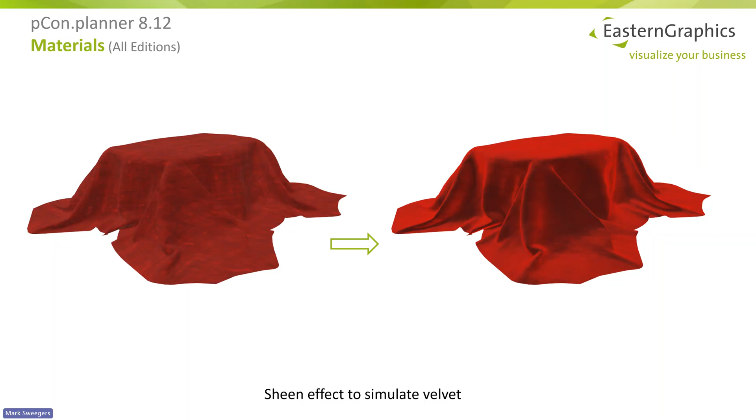So to give you some concrete examples, at first, what are we talking about? This is a concrete example of a sheen effect to simulate velvet, and you can really see the difference in the material applied to the red blanket in this case. The second one, a clear coat.

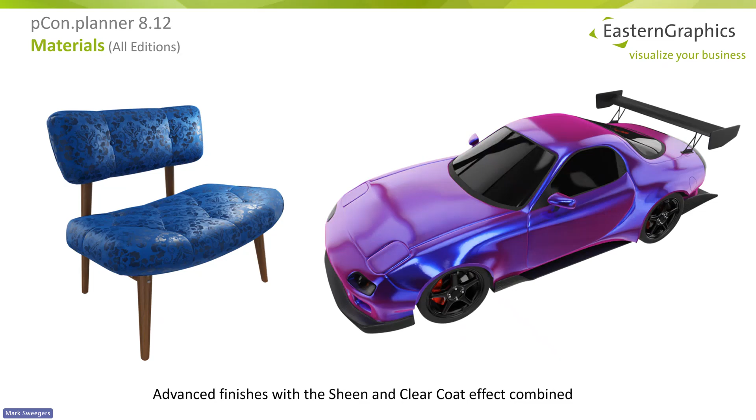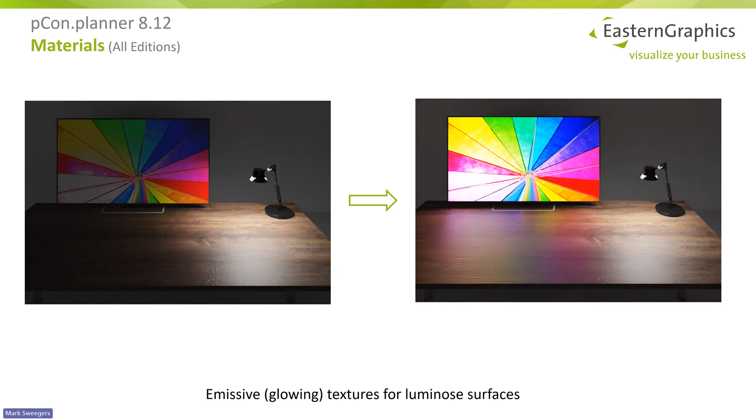And last but not least, the emissive, the glowing textures for luminous surfaces, as you can see on the monitor and on the lamp in the illustrations on your screen at this point.

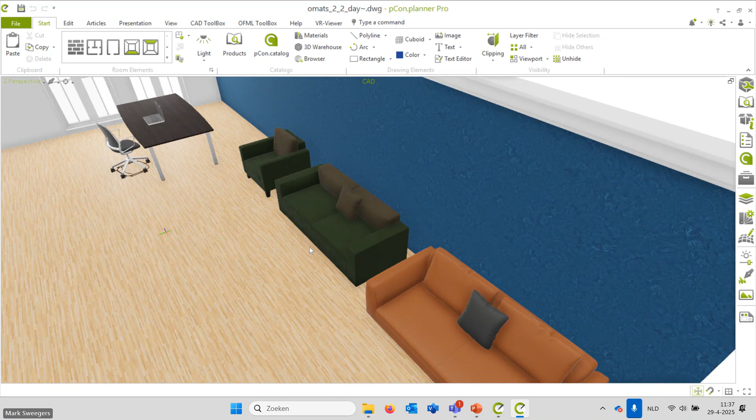So to take you through pCon.planner, what am I really talking about? This is an example of a drawing, a DWG file in the old pCon.planner version. Hope you can see it. Fleur, can you confirm that? Yes, it's visible. So when I zoom in to those couches, they will have a well detailed surface.

But in the new pCon.planner version, we take it to the next level. Same goes for the tabletop and the office chair that has a mesh in it, but isn't transparent, as you can see. We could also apply an emissive or glowing texture on the monitor of the laptop, which I will show you by switching to our new version.

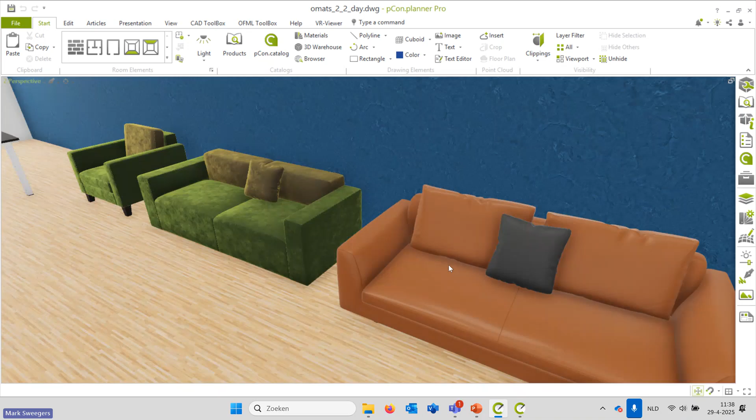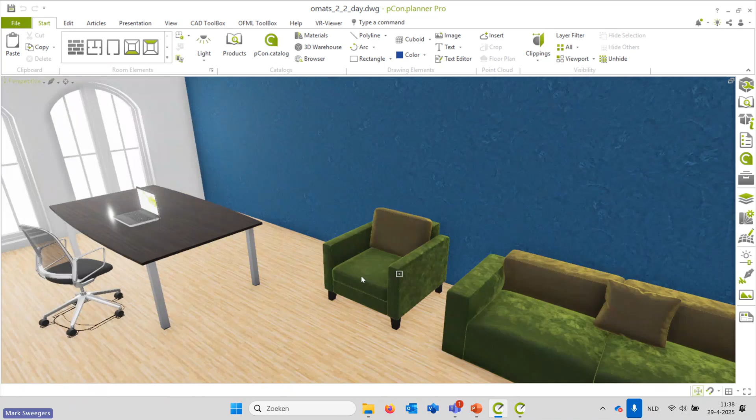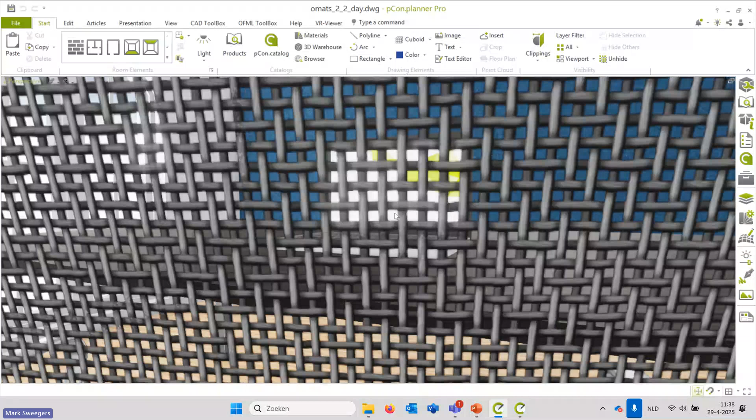So how can you apply those textures? To give you an example of the mesh of the office chair, you see that it has this transparent look, and the mesh itself has the texture where you can see through.

By selecting the material editor and specifically the material picker, selecting the mesh of the chair again, you can see that there are transparent areas present, but also visible and solid areas. In the past, we had a slider and an option to enter a value for transparency. But from pCon.planner 8.12 onwards, you can import a texture via the import function on the right-hand side, as you can see.

And you have the option of importing an image or a texture folder. The file type that you should use for this is a JPEG type. Having done this, you will see the texture map with the material properties, and it looks like a black and white image, but it represents the transparency of the material in a certain way, meaning that the black pixels are the transparent particles, and the white pixels are the solid particles.

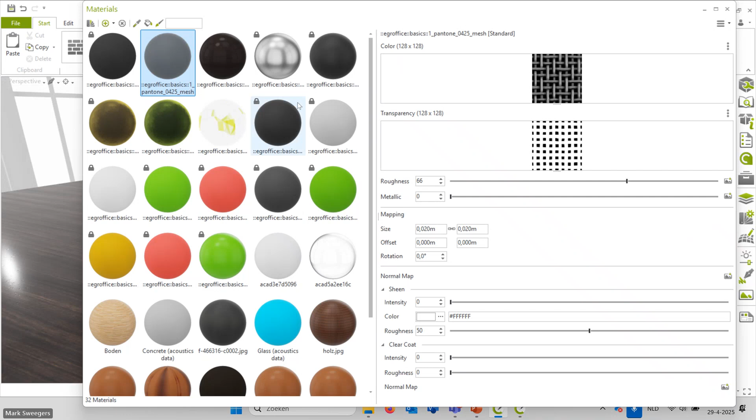So that's the first example. Second example for the emissive or glowing textures is the screen of my laptop that I placed into the DWG file, and also selecting the material picker again and going to my screen, going back to the material editor. You can see that I created this material with a glowing texture, as you can see.

And you could apply this, for example, for electronics and lamps. In previous versions of pCon.planner, you could only specify a base color and a so-called luminance, an absolute value for the luminance material. But instead of using a base color for the luminance material in pCon.planner 8.12, you can now use an image. The bright pixels in the image will emit a quite glowing effect, and the darker pixels in the image will emit a slightly weaker light.

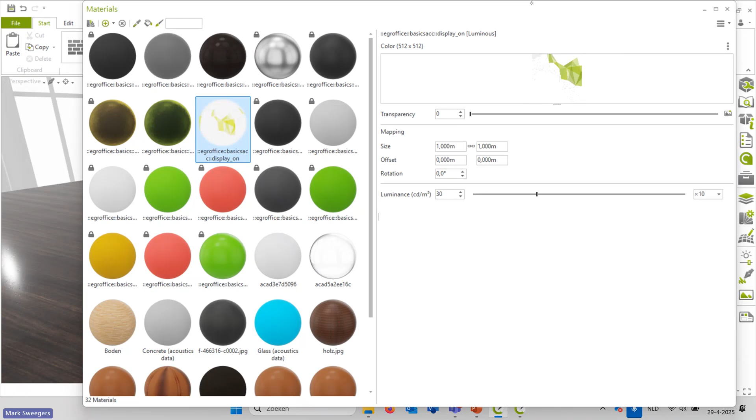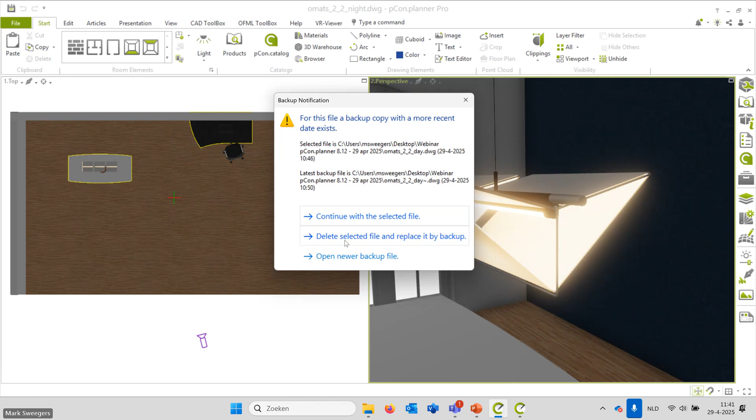So by switching to the night version of this drawing, you can see the real difference, not only in the laptop, but also within the lamp, as you can see. Going back to the daylight version.

The clear coat, that's the next example that I want to showcase, and I already kind of did just now, but taking a closer look at the leather sofa, selecting the material picker again via the material editor, you can look at the material that's being used.

And as you can see, it's a combination of two different normal maps that are applied. There's one default normal map present for the large creases in the sofa, while a second one is created for the surface relief for the leather texture. So that's what you see when you zoom in deeper into the model.

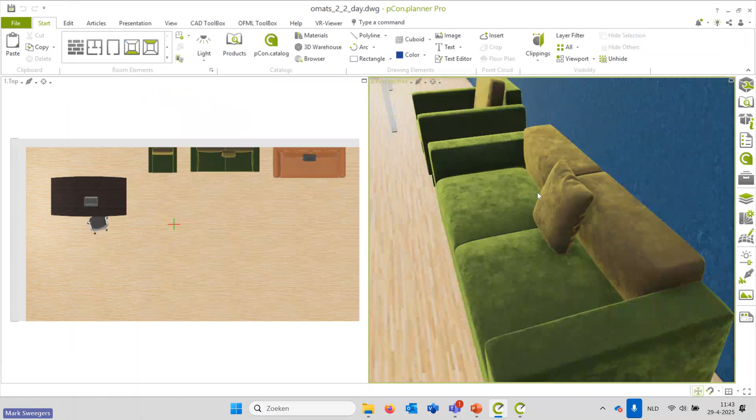Going back to my presentation, as you already saw, the material editor has been enhanced in a way that we now support the new effects for sheen, clear coat, emissive, and opacity or transparency textures.

We have a cleaner user interface, or cleaner layout as we call it. And the way that you apply texture maps is the same for all related texture channels. It can be done by dragging and dropping, by copying, pasting, but it's the same for all textures you want to apply.

As I already told you, more or less, we removed the brightness control. So for now, you have to choose a basic color and put a texture on top of it, alternatively.

In the materials window, the most striking thing that I want to talk to you about is that we switched to a vertical layout instead of a horizontal layout.

You also have the option to hide the material editor, which is being shown on the right-hand side, via the hamburger menu, as we call it. Within the materials editor, you have the possibility to show or hide the editing section in a way that pCon.planner will only showcase the materials, the material library that you use within your planning.

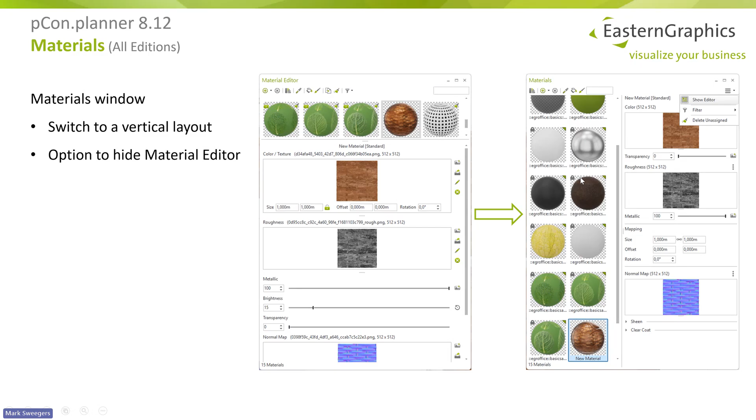So going to the rendering part, based upon the usage of the enhanced materials, but also in general, we fully support the extended materials in the real-time and photorealistic rendering.

We furthermore improved the OSPRay performance, which is almost twice as fast as before. Our colleagues in Germany have managed to make the performance almost twice as fast, based on a test set of real customer examples.

We furthermore support an unlimited number of light emitting geometries, which was restricted to an amount of 1,000 before, but you now have the possibility to go all the way.

And the things I mentioned above apply to the batch rendering version as well, both the local one and the server construction.

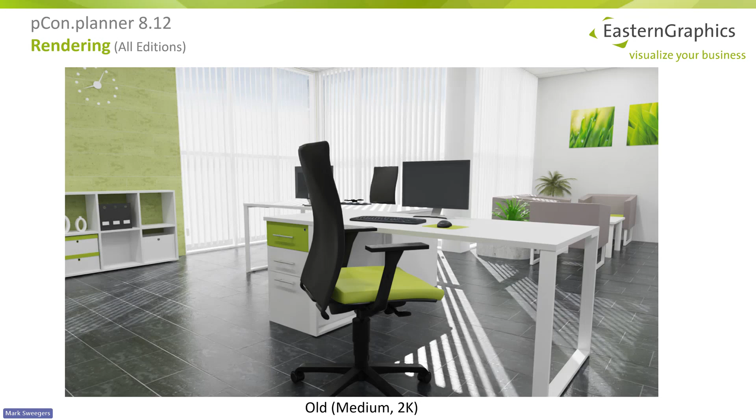To give you a concrete example of a render, this is the old situation within the old pCon.planner, and especially look upon the floor, because this is the new way that new plannings with the enhanced materials are being rendered.

And also within translucent materials, we managed to create a more precise light distribution, as you can see in the examples shown on this slide. So that was the first topic.

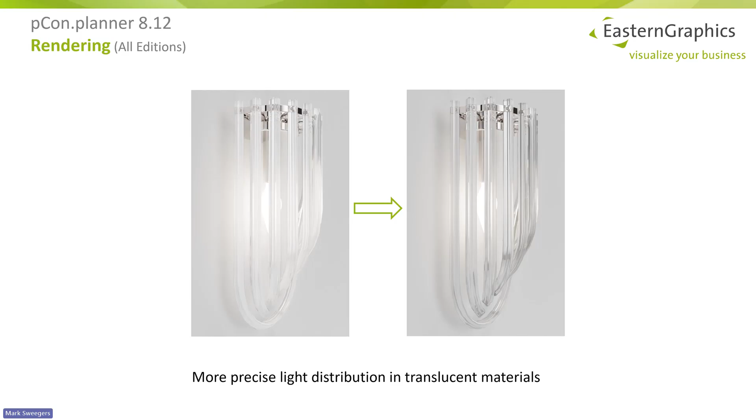The second topic that I want to talk to you about is the introduction of models. We are increasingly talking about models. You may already recognize those models from pCon catalog, but with the new pCon.planner release, they become visible in multiple applications, not only pCon.planner, but also in pCon box and in the web version of pCon.planner.

So basically in pCon.planner, we offer two different libraries ourselves: the product configurator and the pCon catalog. And for users, sometimes it's not entirely clear which library an object comes from.

So with the introduction of the models and articles concept, we bring a stronger differentiation between what we call technically OFML products with price information and pCon catalog products without price information. The breakdown between those models and articles is going to recur, as I said, in various pCon applications: not only pCon.planner, but also in the web version of pCon.planner and in pCon box.

To give you a definition, a model represents an object with a geometry and a description of the object and/or the geometry that's in place. And that's what you can see, for example, in the pCon catalog.

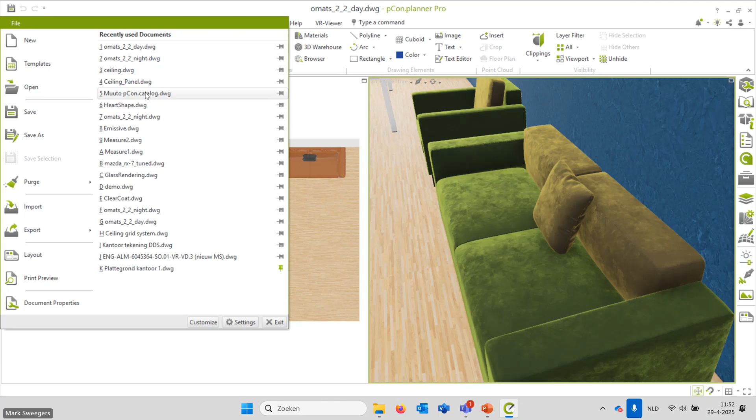Then I'm going to showcase some examples for you as well. So I have two different models that I downloaded from pCon Catalog. And this is a model from manufacturer Muuto. And via the plus icon, I have the possibility to change the configuration of this article coming from pCon Catalog.

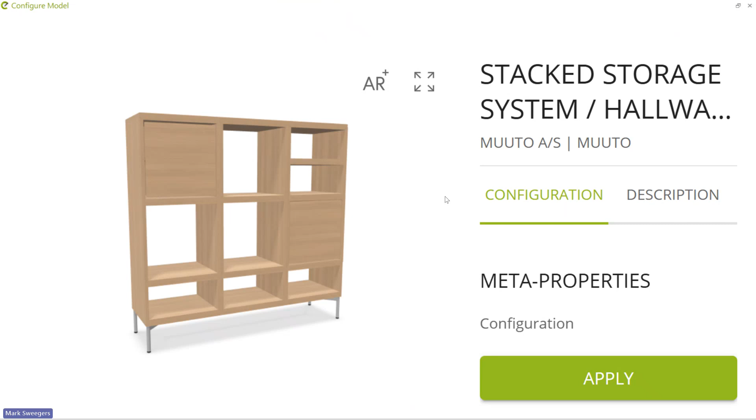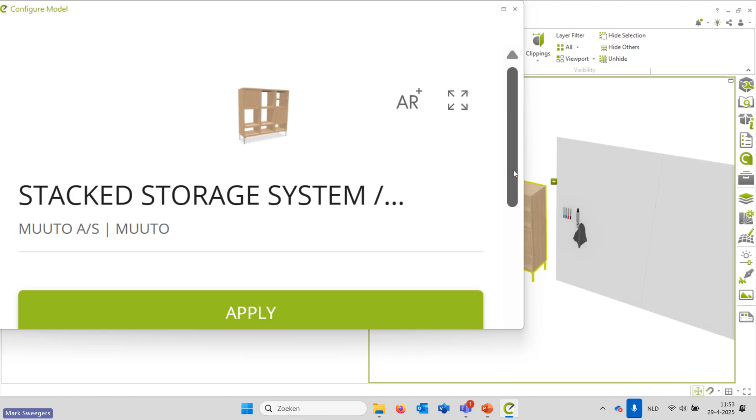Resolution is quite large, as I can see. That's kind of strange. My bad. Don't know why the system is doing this.

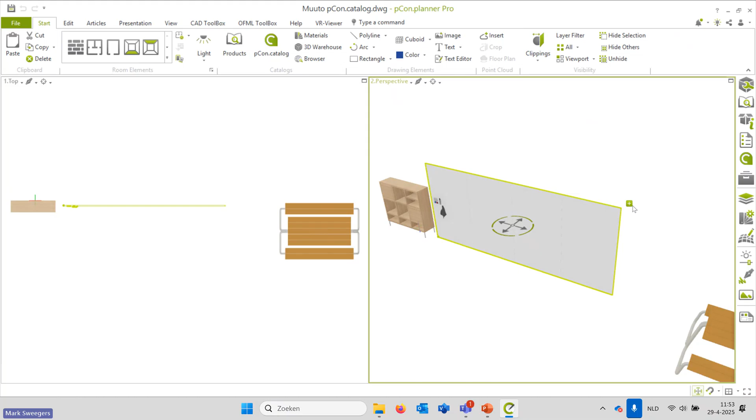But nonetheless, when you click on the plus icon, you have the possibility to change the configuration of this model accordingly, but the system will take you back to the pCon Catalog area in which you downloaded the model in first place. This is like a whiteboard from Chameleon in which you could say, I want to change from a model to an article.

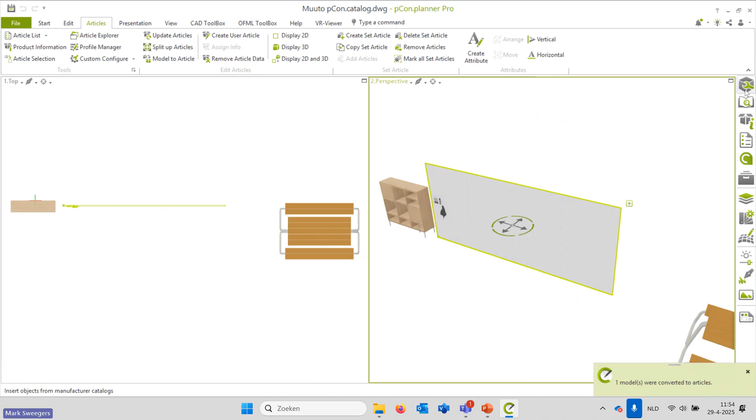So in this case, coming from pCon Catalog, you don't have any configuration possibilities whatsoever. But changing it from a model into an article, the system says one model was converted into an article, and going to the properties area, you will have the configuration options and pricing information in place, because the system now detects that we're talking about an article and not about a model anymore. So that's the way that you could apply this technique within your own drawings, in case you would like to.

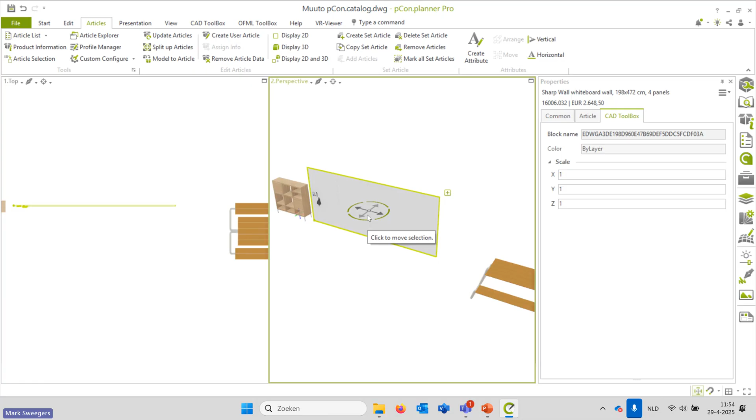So you can download a model from pCon Catalog, and if the relevant manufacturer has loaded the OFML data also into pCon Catalog, it's possible to convert it. So it can be done in all versions of pCon.planner, so also in the standard and in the ME edition. And you could also convert complete drawings from models to articles. So the system then will detect how many conversions can or cannot be performed successfully.

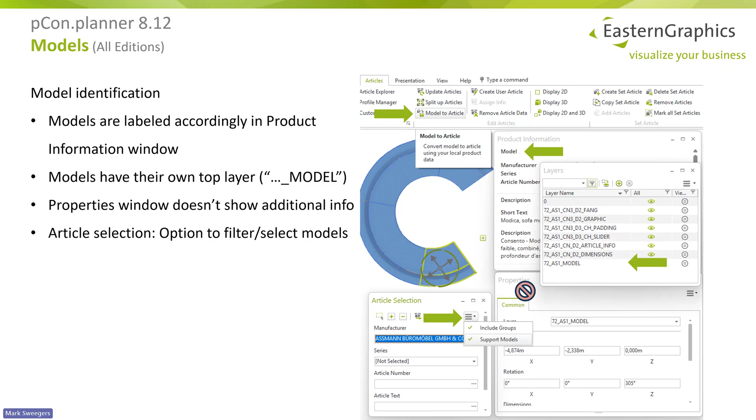So going to the third part, the online services part, we first make a connection between the pCon Catalog to the modeling concept. And what I mean by that is the pCon Catalog, the downloaded objects from pCon Catalog, as we already saw within the second topic, are automatically converted into models.

And static models retain pCon Catalog information in form of a user article. So it's always possible to create like user articles in pCon.planner based upon models that you download within pCon.planner. But in case that the OFML data of a manufacturer is not in place.

Furthermore, for pCon Catalog, we improved the basic usability, which means that the last view of the pCon Catalog is preserved by reopening the pCon Catalog window, and the materials tab also preserves the current view. But a remark, this just works with the pCon Catalog window and not within the integrated browser within pCon.planner.

Furthermore, we have an improved download handling. So for a better error handling and logging coming from pCon catalog.

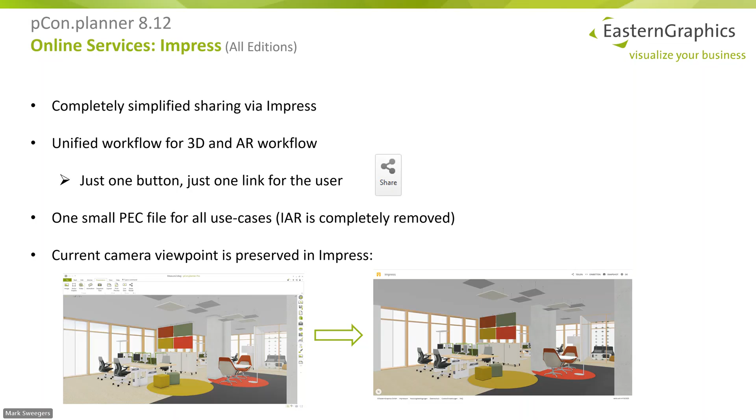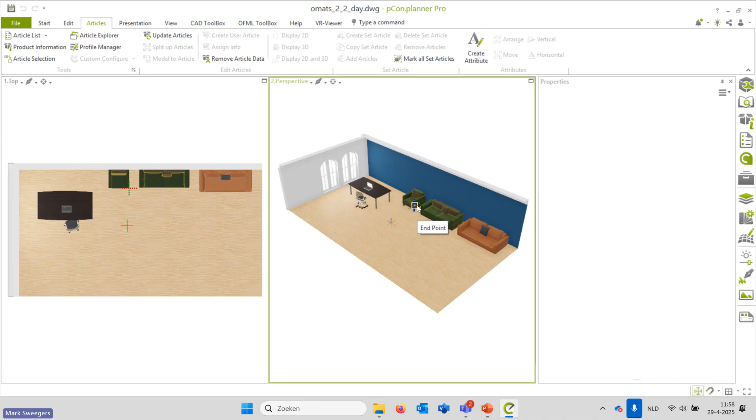So, to give you a concrete example, going back to this one. Once I select this, this view will be used to generate the 3D view within the planner. In this case, I'm clicking wrong. I'm going to presentation and I will say share accordingly.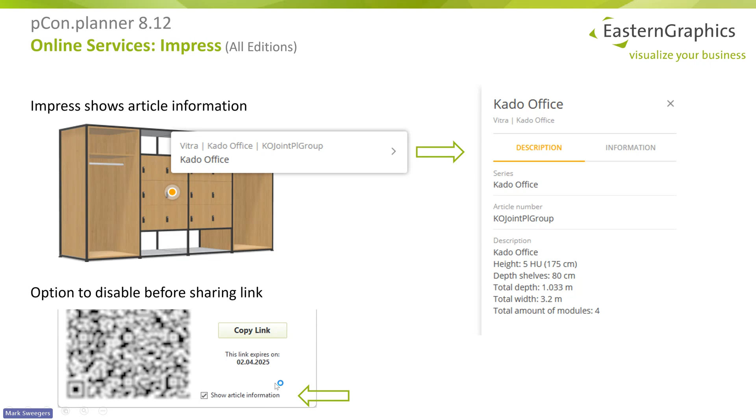The fourth topic, new measurement features. The dimensions of selected walls, so inner walls, outer walls, floors, ceilings, and pitch roofs, can be viewed within the properties editor. Within the information area, you can use the calculated surfaces in an easier way to roughly determine what you need for wall paint, for example.

And the example being showcased on the screen for walls, this is a new feature that distinguishes information between the inner and the outer walls. So the outer wall refers to the area size A, and the inner wall refers to the area size B. The first value displayed is the size of the wall excluding the wall elements, and the second value within the brackets is the total area, including the room or wall elements. So the labels A and B in this case are also being shown in the drawing itself.

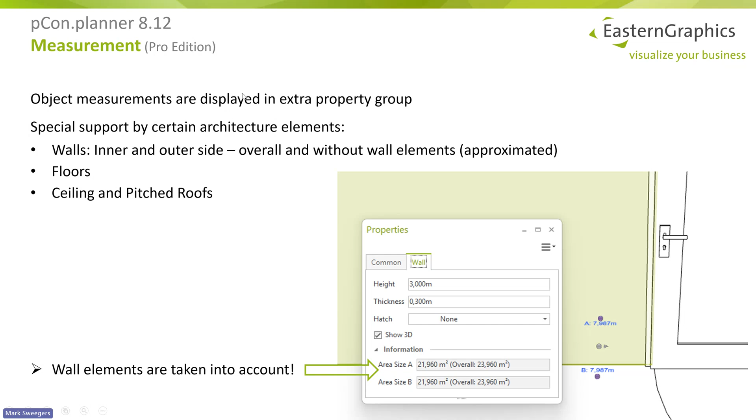So if you put in doors, windows, or maybe glass walls, you will really see the difference. So let me take you to pCon.planner from there again.

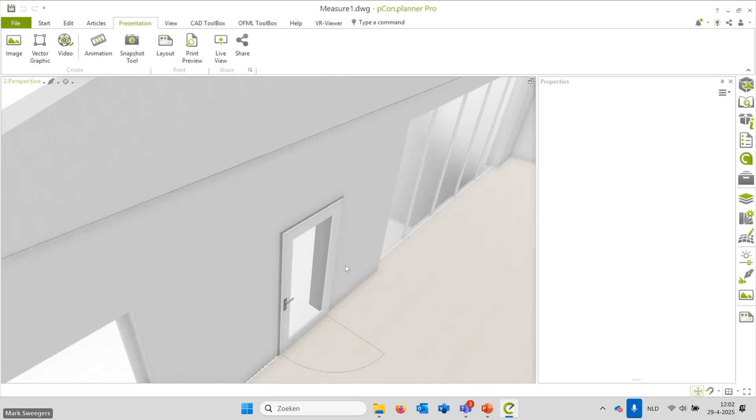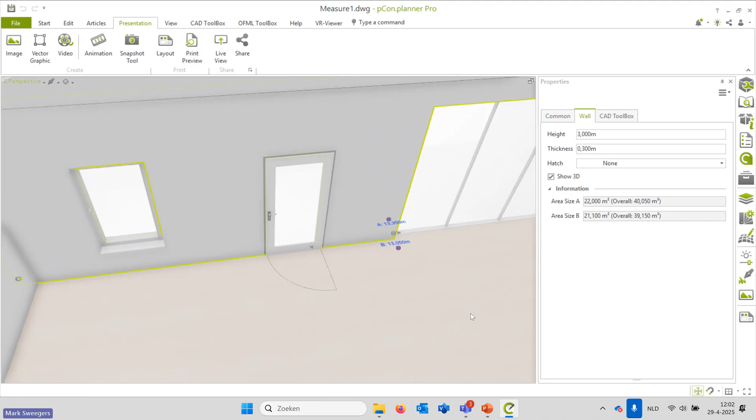And zooming in into my drawing, selecting the wall in this case, you will see a label A and a label B, which gives you some detailed information about the surface of the selected element with and without the incorporated wall elements in this case. So that's also the information that is being shown here on the right hand side within the properties.

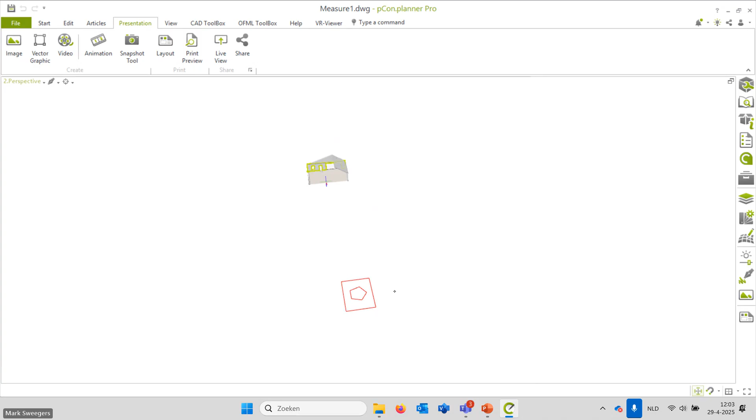So this is not only applying to 3D models, but also to 2D models, as you can see over here. This is a 2D shape of a heart, as you can see. And on the right-hand side, you will find some more information about the area size and the perimeter in this case. However, you have to keep in mind that it has to be a model that is really enclosed.

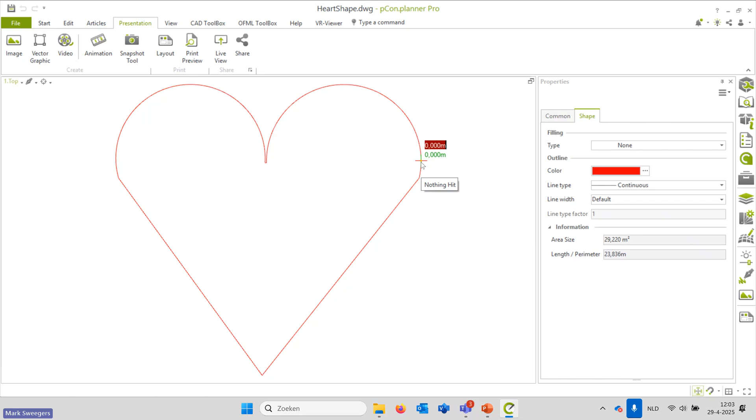Because once I do this, for example, the system will say invalid for the area size because it isn't able to calculate the area size anymore. So that's something that you kind of have to take into account. But as you can see, the dimensions of 2D drawing elements are also displayed. So this includes polylines, rectangles, areas, shaded 2D elements, and more.

And for example, this gives you the possibility to use these shapes as a tool to determine the areas and perimeters of custom rooms in this case, so maybe not in a square or in a rectangle, but in a custom shape. So that's kind of what I wanted to discuss about the measurements. Taking me back to the presentation again.

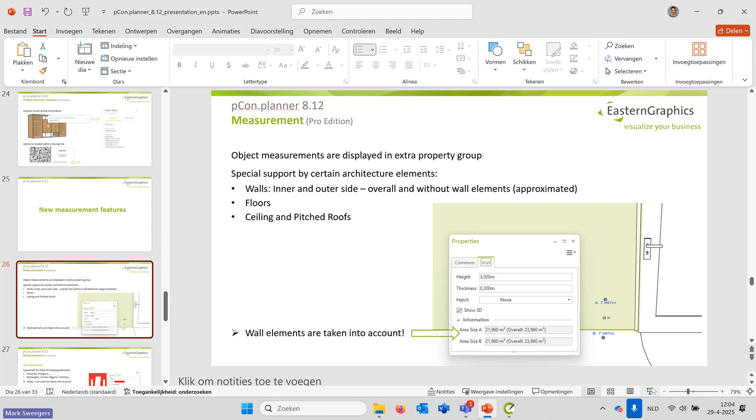Going to the last topic, ceiling grid system. We have a more flexible ceiling grid system within the 8.12 version of pCon.planner. Previously within pCon.planner, you could basically choose between a flat ceiling and a grid, or a so-called ceiling system, and the grids of a ceiling system were always square.

And for example, you can think of rectangular tiles or S-shaped tiles, but also settings for joints, spotlight parameters, and offset options to give you more creative freedom in this case. So as I say, it's allowing you to design ceilings in a custom way.

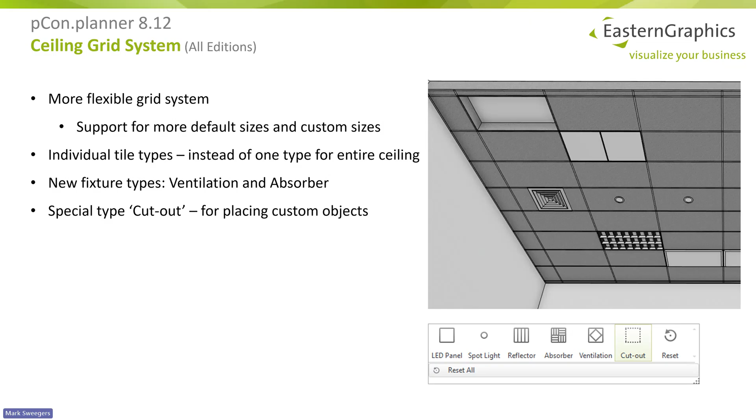So looking from a top view, this is kind of what you see within the pCon.planner, and I will showcase it to you directly in the application later on as well.

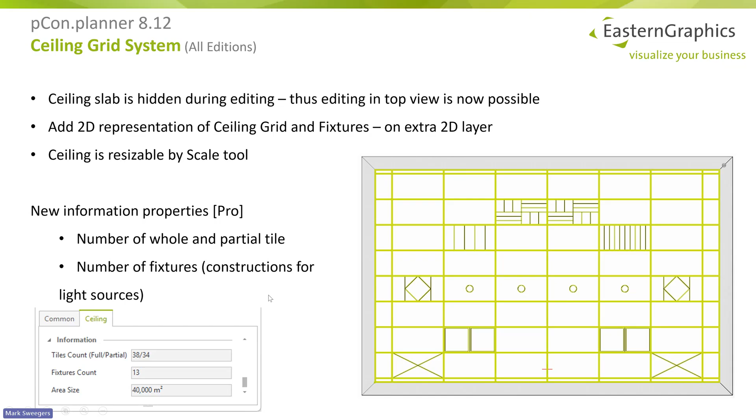New information properties also for the number of whole and partial tiles, as you can also detect within the planning itself, and the number of fixtures for the constructions of light sources in this case.

So a concrete example of how it should look, how it could look in this case, taking you to the pCon.planner and giving you a concrete example on how it could look.

It could look like this, for example. So I'm entering the settings of my ceiling grid system from a perspective view, and by double clicking I will now get a dynamic window on top of my screen where I can add or remove some parts of my ceiling grid. So for example, I want to create some extra spots in this case.

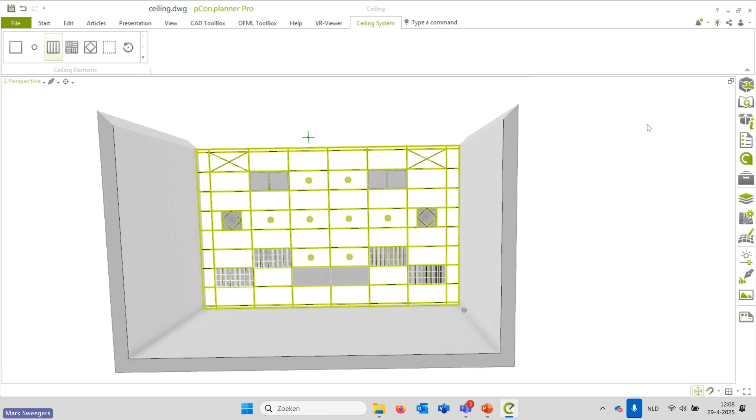Or I maybe want to add some reflectors. You can see that it's done over here in this case. So yeah, I would encourage you to try that out for yourself, also with the new possibilities.

By going to the property window, you will also have the possibility to create joints in this case, and change the measurements of the grid itself, for example.

That's basically what I wanted to discuss with you about the ceiling grid system. As you can see, the information shown below is the tiles count, full and partial, as you can also detect that there are also partial tiles in place, the fixtures count, basically how many light sources could be incorporated, and the area size of the ceiling grid.

So go try that out for yourself, as I already wanted to encourage you in this case.

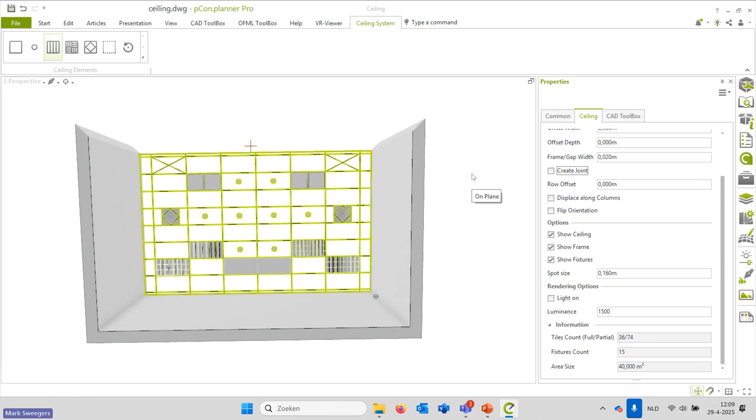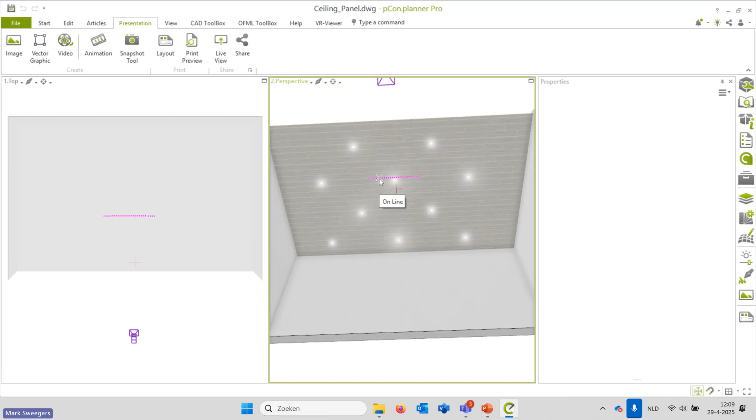So also looking at the time, I guess this is it. Maybe some final encore. This is what it could look like indeed by completely editing your ceiling grid, for example.